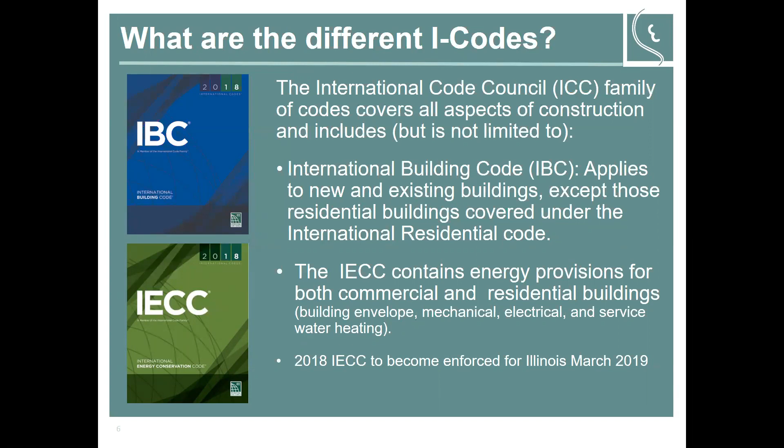And I will note that the 2018 version of the International Energy Conservation Code will become enforced starting March 1st of 2019 with Illinois specific amendments. Updates for this process will be posted to our website as they become available.

One benefit is the International Code Council does provide free access to their codes through an online version. This is a searchable file, but it does not allow for copy and paste. But this can be a very good resource for reference, particularly that search and find feature. So you can search for a term and jump right to the applicable code sections.

Two things that you will see in the International Energy Conservation Code are the terms prescriptive and mandatory. Prescriptive is a compliance path that is kind of like a grocery list, where in order to meet the code, you have to get all the items that are on the list. If you meet each of the provisions individually, you are shown to be in compliance. Mandatory provisions, on the other hand, are required to be complied with regardless of your compliance path.

As we talk about the various building codes and international codes, we do want to ask a question here regarding which building code cycle your municipality is on or the significant portion of your work occurs on. So we'll push that out here and allow people to indicate what building codes you are most seeing right now, not so much the energy code, but the actual building code itself for your area.

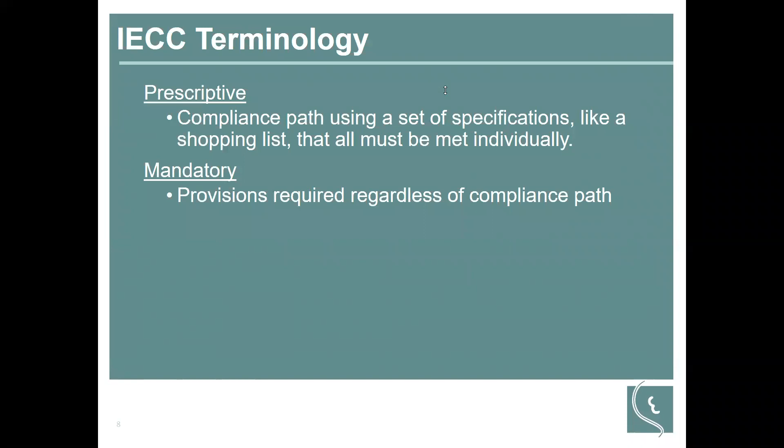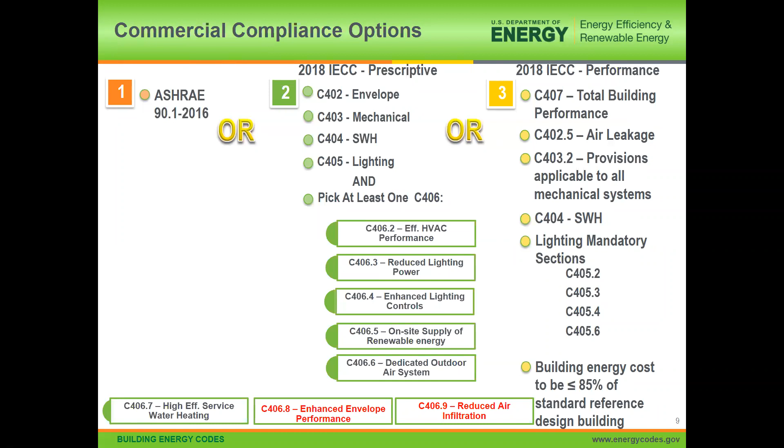But before we do that, let's real quickly take a look at low energy buildings. We sometimes get questions from folks wondering if they can be exempt from the envelope provisions by qualifying as a low energy building. Well, if your peak design rate of energy is less than 3.4 BTUs per hour per square foot, which is equivalent of about 1 watt per square foot of floor area, then you could be exempt from the envelope provisions.

Or if those portions of the building do not contain conditioned space, such as if you're just appending something to your building, such as a storage area or greenhouses. If it's labeled as a greenhouse, it has to be used as a greenhouse. It can't be used as something else.

So the peak design rate, that's a very low rate of energy, the 1 watt per square foot, but you could comply as a low energy building and have an occupied space that's less than 1 watt per square foot. As Ryan was pointing out to me yesterday, the passive house is at approximately that level, and there are people building buildings that use less than 1 watt per square foot.

But if you're doing that, then you are way beyond the envelope provisions in the code anyway. You would be having a very high quality building at that point anyway. So you would be exempt from the provisions if you met that standard.

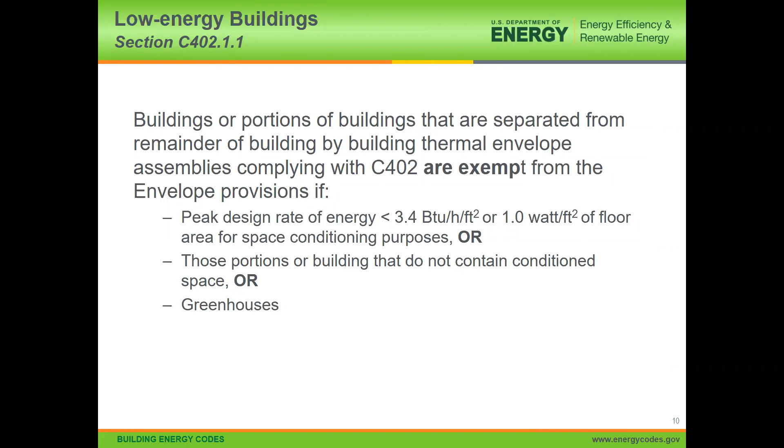Equipment buildings are also exempt from the building thermal envelope provisions. Small buildings, under 500 square feet, intended to house electronic equipment, the buildings you see next to cell phone towers, relay stations, and things like that. The heating capacity of those has to be less than 5 kW, so that's not a lot. And the average wall and roof U-factor still has to be 0.2 or less in climate zones 1 through 5.

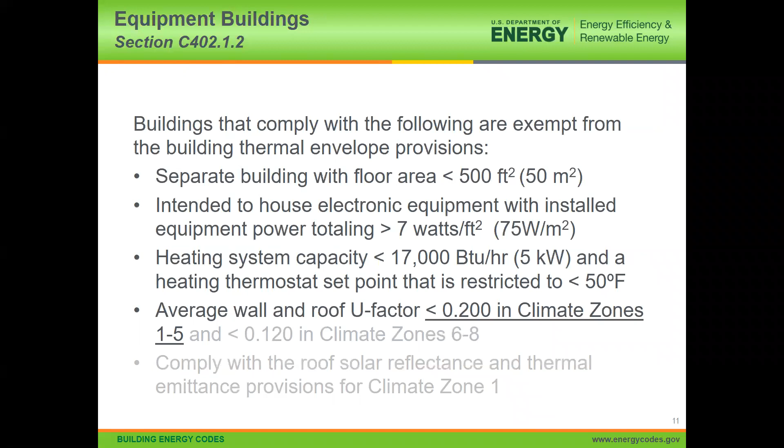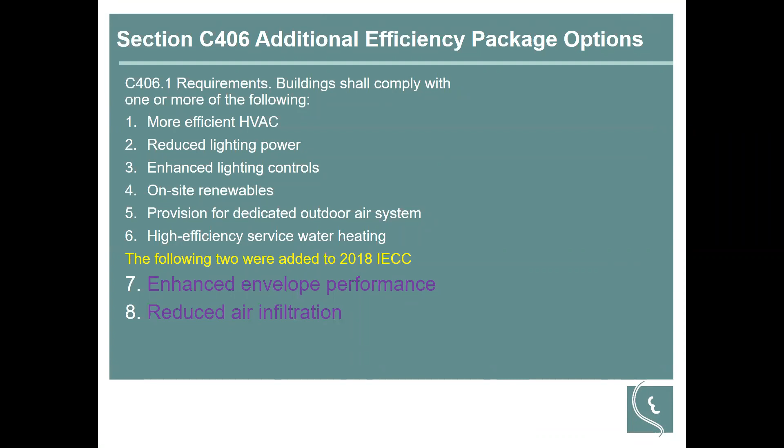So in the prescriptive path, as I mentioned, you have to pick one of the following 8 requirements. So we are going to look at the enhanced envelope performance and reduced air infiltration. So enhanced envelope performance: the total UA of the building thermal envelope design shall be not less than 15% below the total UA of the building thermal envelope in accordance with section 402.1.5. So we look at the code, go to that table, C402.1, I think it's, let me see which table that is.

I'm sorry, 402.1.3, it's the R value table. Or I'm sorry, the next one, 402.1.4, that's the U value table. And you have to be 15% at least below that to qualify for enhanced envelope performance. And enhanced envelope performance oftentimes is using more insulation or addressing thermal bridging.

Thermal bridging is a big deal in buildings. We've known about thermal bridging for a long time. Many of you have probably seen thermal images of buildings, so you can pick out every stud in the picture. So thermal bridging is a big deal.

And I found this one document, the BC Hydro, it's a Canadian company from British Columbia. They fund some very good building research. So if you're interested in looking at how to reduce thermal bridging in buildings, that was one of the first documents I would take a look at. You can see there's a link to that document on the left side there at the bottom.

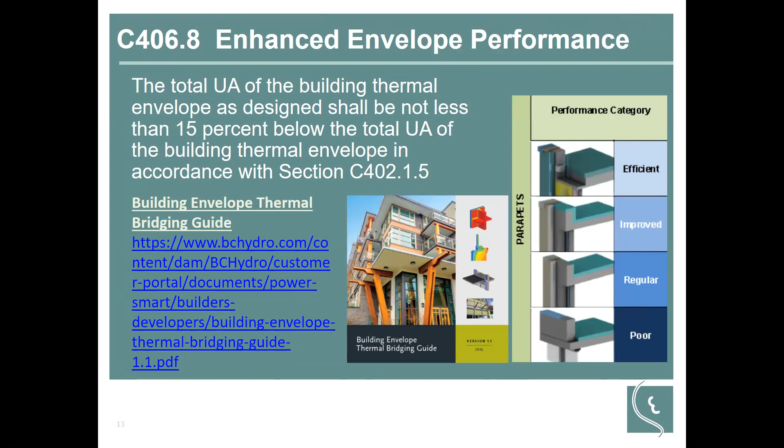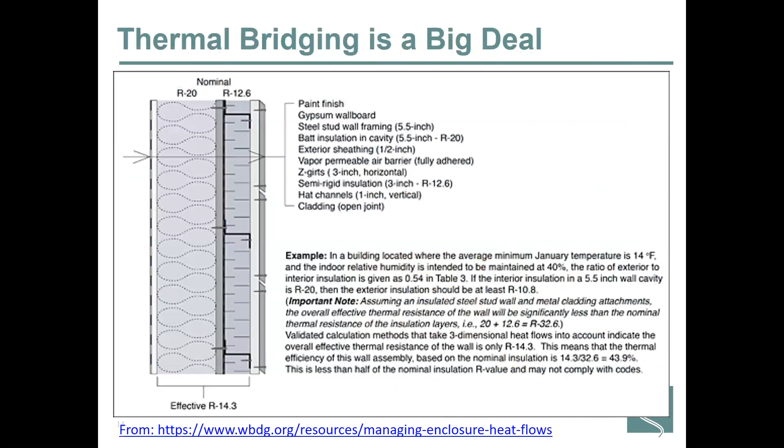So the Whole Building Design Guides are very good resources for information on how to mitigate some of these issues of thermal bridging. So the C406.9 addresses reduced air infiltration. And we do this by pressurizing the buildings. If you have never been involved in a blower door test, if you have the opportunity, they're fascinating tests. And we conducted a lot of those for HUD, and it's amazing where you will sometimes find leaks that you would never have guessed are present.

So to comply with this, the measured air leakage rate shall not exceed 0.25 CFM per square foot under a pressure differential of 75 pascals, which is a fairly large pressure differential. And that square footage is the building envelope surface, which includes the below grade building envelope. So if you have a very large building at 250,000 square feet or more, you do not have to test the whole building at one time, which would be very difficult. Tested areas shall total not less than a quarter of the conditioned floor area.

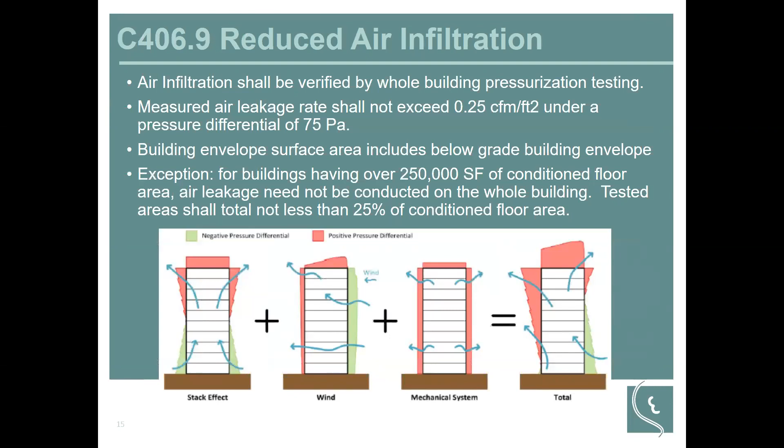So like I mentioned, those last two under the prescriptive, the enhanced envelope or the reduced air infiltration, those are the two that we just covered. And once again, a Canadian source of information, Canada Mortgage and Housing Corporation, they've sponsored some very good research. You can tell that a lot of effort went into these publications, and naturally it gets quite cold up in Canada, and they want to address these types of issues.

Air leakage control is a big deal also, similar to thermal bridging, and this is a very good document. The link is there in the blue, as you see on the bottom left. It's a fairly long document, but it has a lot of very good graphics in it, pictures of how to seal buildings, and it's just in general a very high quality document.

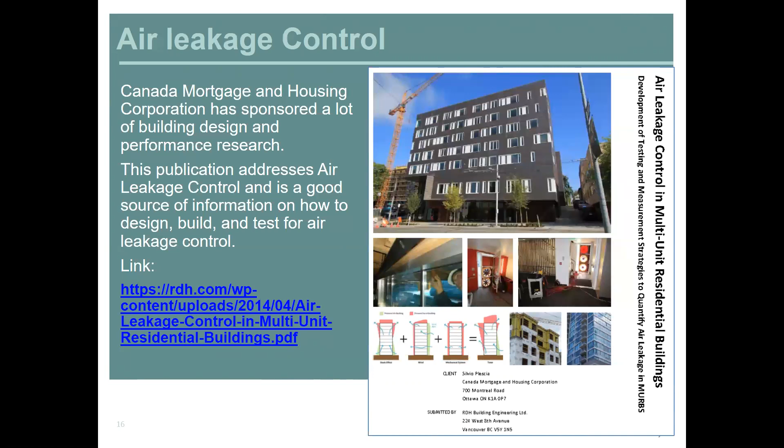Right. Now, as far as how to determine the thermal envelope compliance for the Energy Code, the International Energy Conservation Code provides 3 different methods for compliance. One is the R value table that we had talked about earlier for C402.1.3, and then next is the assembly U factor tables for C402.1.4. And the third is a component performance alternative found in C402.1.5.

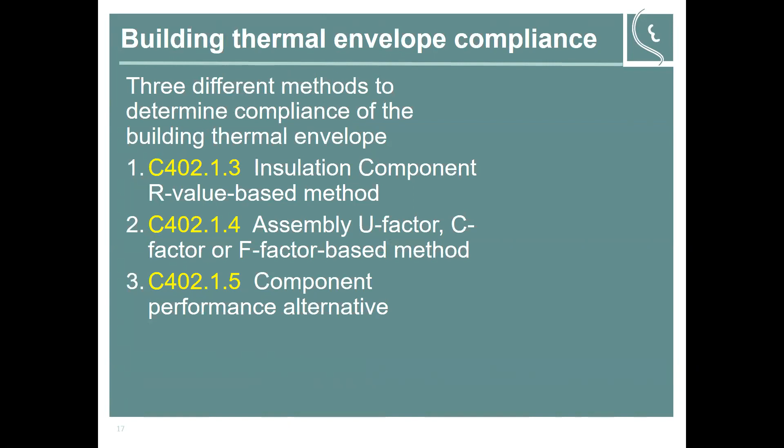And we'll dive a little bit further into what those actually are. So looking at the R value table, again, this is more of a component-based. So if we look at roofs, there was a lot of discussion that we've been hearing as far as roofs, particularly those with insulation above deck. Here in the code, it calls out an R30 continuous insulation value for that.

And so you go through this table and look at each component: the roof, the walls above grade, walls below grade, floors, if you do have applicable and required insulation for floors, such as a floor over a non-conditioned space. You go through component by component and see if you meet the required R value for each one. As noted here, the R value cannot be less than the amount specified in the table, and there are some specific envelope insulation requirements.

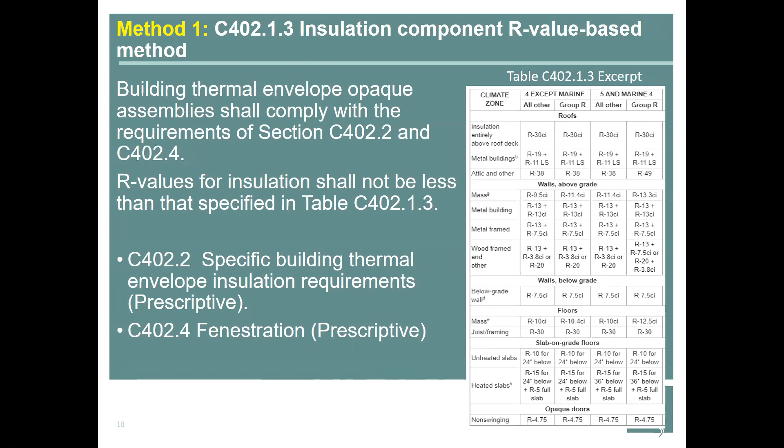So this is one table, and then there's another table for fenestration. Looking at the U value table, this is a fairly similar table to the R value, with U value being closely related to an R value, or a close approximation to the reciprocal of the R value. So with these U values coming into play, this is another method of performance for materials that may be valued based on a U factor rather than an R value.

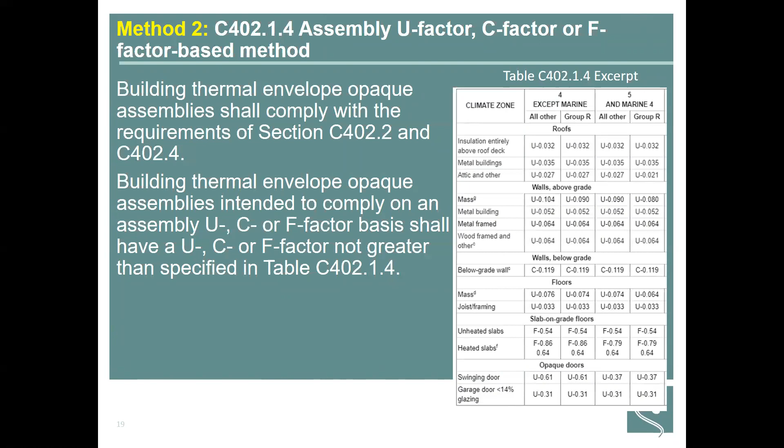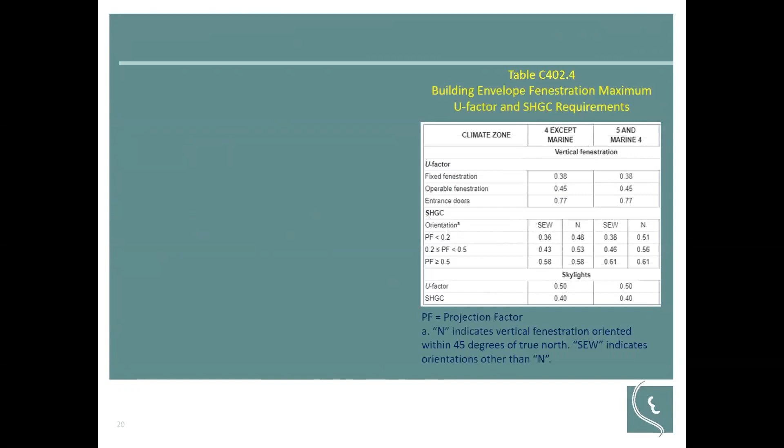This is a continuation of the last slide. This one looks at the fenestration, looking at the U factors as well as the solar heat gain coefficients required for compliance. And as you can see, there's a difference between vertical fenestration, more commonly known as doors and windows, versus skylights, skylights having a slightly less stringent value than the fixed fenestration.

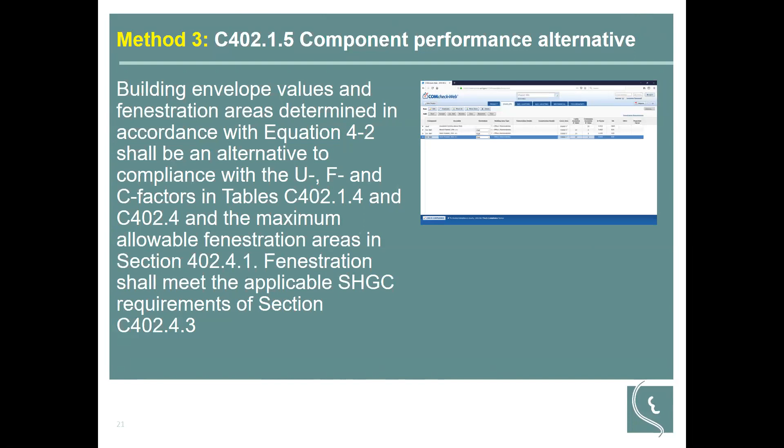The third method, which is probably the more common one that we see used, is component performance alternative. This is the method that is typically used with COMcheck, where this provides some trade-off ability between sections of buildings. So if you have a particular area where you would like a decorative window, a beautiful stained glass window that may not necessarily comply with the U value or U factor tables, you can use this to improve the envelope performance in other locations to bring the total building into compliance. Kind of like a budgeting method where as long as you don't exceed your budget, you can trade money around in different categories.

So this is a little bit of an improvement to the code for heated slabs for 2018. Prior to 2018, the code didn't require continuous insulation underneath heated slabs. Now you have the upgrade for slab on grade floors, moving from an R10 for an unheated slab up to an R15 for a heated slab, as well as adding an additional R5 under the entire slab. And a critical reason for this, as we've touched on, is providing that thermal break to prevent thermal bridging between the inside and the outside.

And if we think about how important a thermal break is, think about a hot cup of coffee in a styrofoam cup. The R value of that styrofoam cup is very minimal, being only maybe an eighth of an inch, maybe 3/16 of an inch thick, but that thermal break between your hand and the hot coffee is extremely important and can be very effective just by preventing that thermal bridging from occurring.

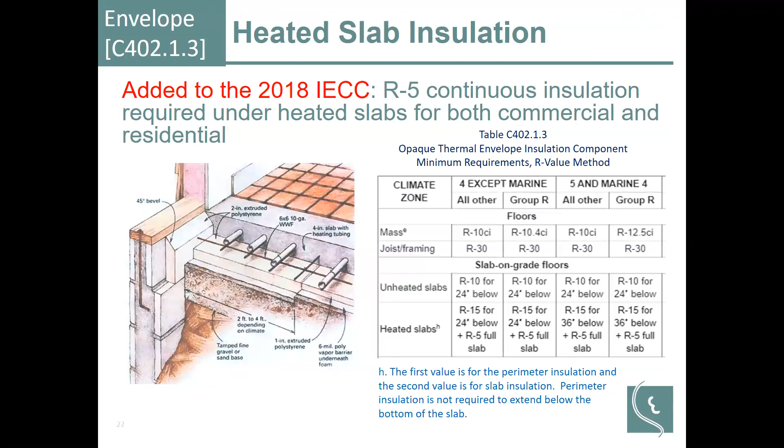Garage door glazing. So this is for commercial doors that have a minimal amount of glazing, now providing a U factor for that glazing in those garage doors.

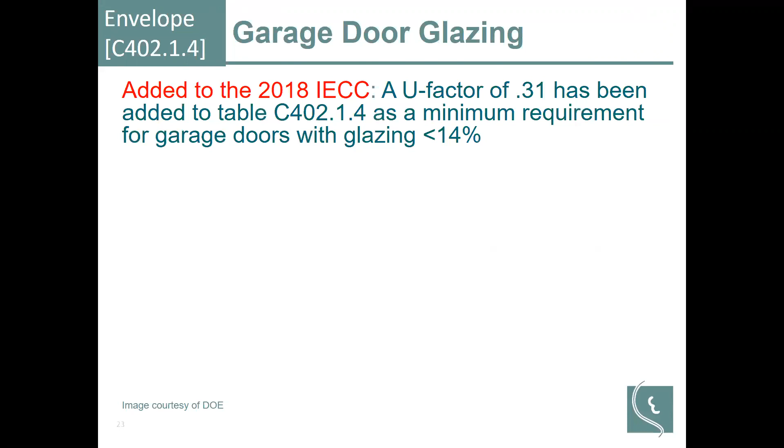Roof insulation: the code now calls out that roof insulation has to be a minimum of 2 layers when you're using continuous roof insulation. Again, in this climate area where we have an R30 required, this is generally not a big issue, being that continuous insulation of R30 is somewhere between 5 and 9 inches. So having 2 layers of insulation is fairly common.

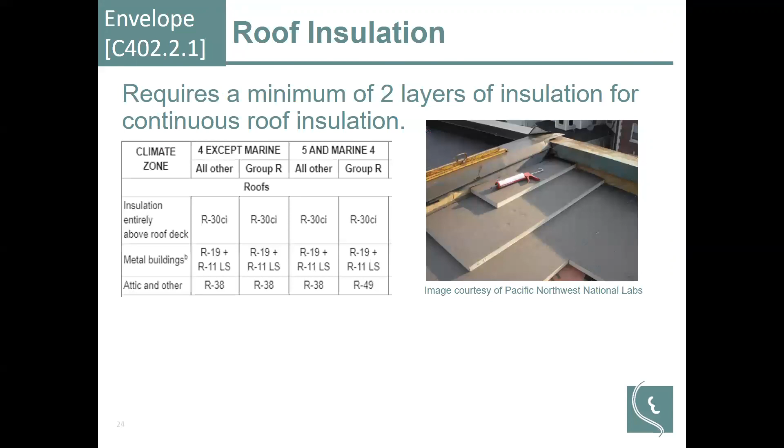Now something I will call out in this photo is we do have a potential flashing issue where this roofing meets the parapet walls and that common wall. And be cognizant that the code does make some allowance for renovations where existing conditions may not allow you to fully comply with the code, so make sure we're doing the best that we can within the existing conditions that we are given.

As far as tapered roof insulation, this is a difference between IECC and ASHRAE 90.1. IECC does have a provision for tapered insulation, whereas 90.1 does not. What this allows for in the IECC is a reduction of up to 1 inch from that required to achieve the R value specified in the table. So in this case, using our R30 again, if I'm presuming an insulation with an R6 per inch to be used, that would be about 5 inches of insulation to reach our R30.

So what this allows for is if we're using a tapered insulation, the minimum amount that we could go down to would be 4 inches, assuming there's no technical infeasibility to fitting that much insulation during a renovation. But this does provide for a minimum amount of insulation, and the overall R value does still have to comply with the table.

Now with tapered insulation, even if you're down at an R24 at the minimum, your maximum as you move away from your roof drains and your scuppers could be rather substantial. It's not uncommon to see an R40, 50, or even 60 as you move away from those penetrations.

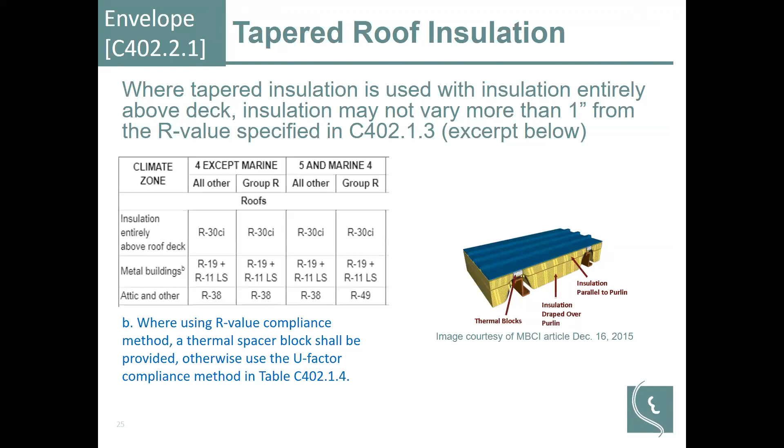One that's parallel to the purlin, which is your cavity insulation, along with the thermal blocks to prevent that thermal bridging. We've got non-compressible insulation to provide that thermal break between the metal inside of the building and the metal roof deck for the building.

One of the new additions to the code are skylight curbs that have to be insulated. You see here in this illustration that most of that curb is insulated very well because it's adjacent to the roof insulation, but anything that projects above that roof insulation has to have a minimum of R5. Which isn't a lot. Ryan and I were talking about this yesterday.

Warm air rises and warm air can carry more moisture with it. So if you have a lot of warm air that's fairly moist pooling up in your skylight, where's the first place where you're going to experience problems? Well, it's right in this area, where this is going to be the coldest part, right up in here.

So the drywall in this area will have moisture, and down in this area, not as much moisture. And if we're going to have any type of mold problems that start to evolve, it will be up in that higher portion rather than the lower portion. But at least we've got the R5. That's better than nothing.

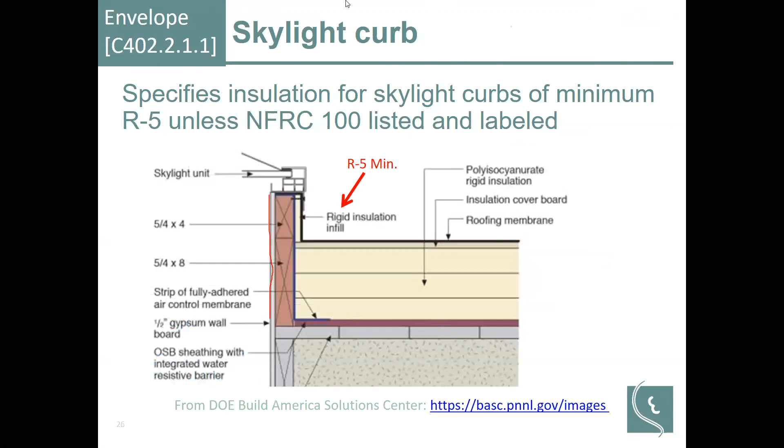It's not working here. It's not advancing. I'm sorry. There we go. Okay, we're having a problem advancing the slide.

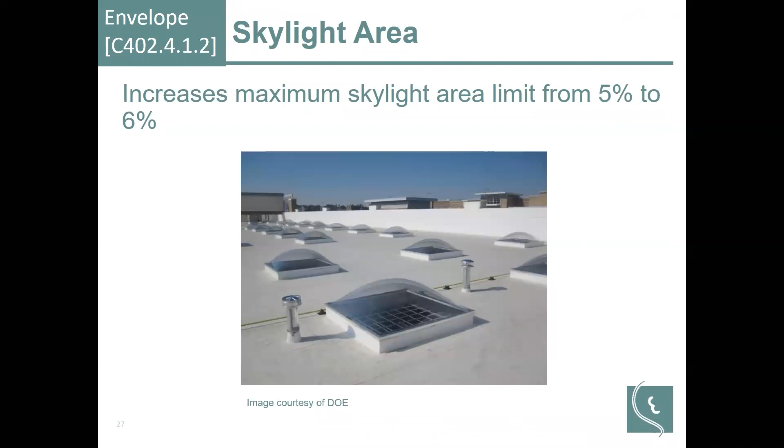Skylight areas: in large spaces you have to have skylights, which we'll talk about in the next slide, but there is an increase now in the maximum amount of skylight area you can put in from 5% to 6%, and that is if you have certain daylight dimming controls for your lighting system on the inside. And you have to have minimum skylight area in spaces over 2,500 square feet, with at least 75% of the ceiling over 15 feet above the floor.

And there are a lot of different types of spaces that this is required in, such as offices, lobbies, atriums, concourses, corridors, and the list goes on and on. A lot of spaces where you have to put skylights in for natural daylighting.

They have to have a glazing material or diffuser with what's called a haze factor of greater than 90%, so that we're not getting direct sunlight beaming down into our space. We want to diffuse that, not have that direct beam pouring into our space. So there has to be some type of diffuser, and that may be the skylight itself or something below that skylight.

I guess the biggest concern, and always has been, is that skylights can leak. If we're going to have a roof leak, it's usually going to be at a penetration, as you see in the photograph there, either at the vertical penetration of those vents or probably around a skylight. The field usually is not what leaks. But with modern roofing materials, those are much less of a concern these days if it's done properly.

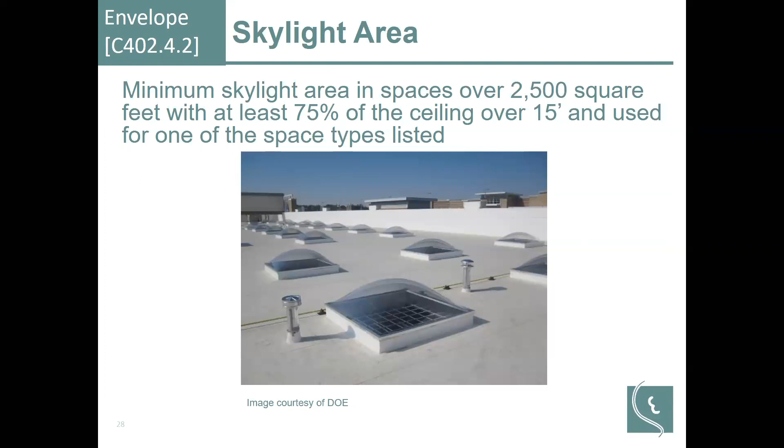And there have been a lot of studies showing people like being under skylit spaces. I think it was Walmart that conducted some studies, and they found higher sales under skylit areas in their stores. There have been studies in office buildings where people prefer to be in daylit spaces versus non-daylit spaces. So there's a lot of good reasons to put skylights into a space, and it reduces your lighting load too. So it's an advancement in the code.

This is also new in the code, masonry walls with integrated insulation.

We're all familiar with the cavity wall with the continuous insulation, and ones below that are either foamed in place or the molded polystyrene inserts. Those used to be, you couldn't use those or justify them for insulation purposes. Now you can, but you have to use the U-value table if you're using those forms of insulation. So the R-value table you can still use for the continuous insulation, which is table C402.1.3, and then the following table, C402.1.4, you have to use the U-value table for the latter, the bottom two there.

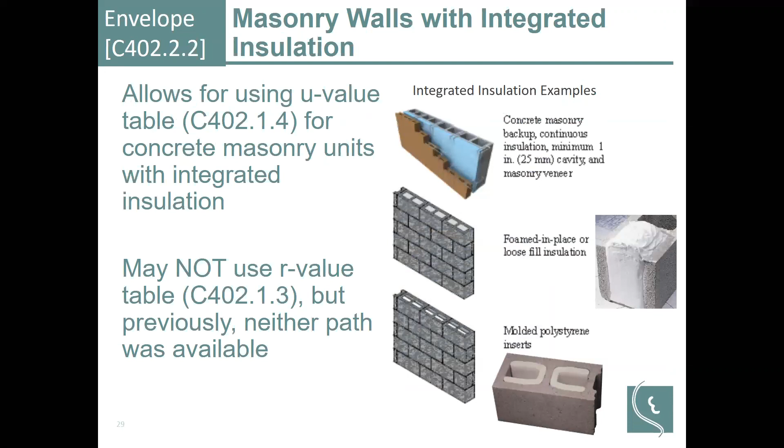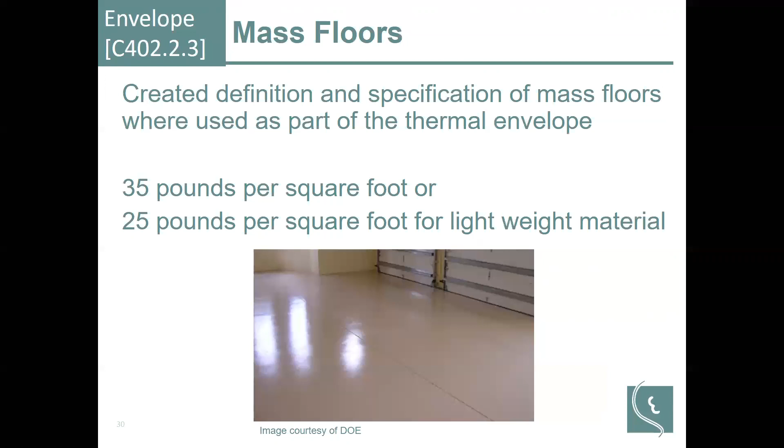A new entry into the IECC are mass floors. There always was C402.2.3, but a new addition to that, they call out mass floors, and those require a different type of, you can see here, well, they're 35 pounds per square foot or 25 pounds per square foot for lightweight materials. The structural concrete is up to about 150; a lightweight structural concrete is about 115 pounds per cubic foot. So that would fall under probably the 25 pounds, and standard weight concrete is about 150 pounds. That's the 35 pounds per square foot. That's just called out in the code differently now.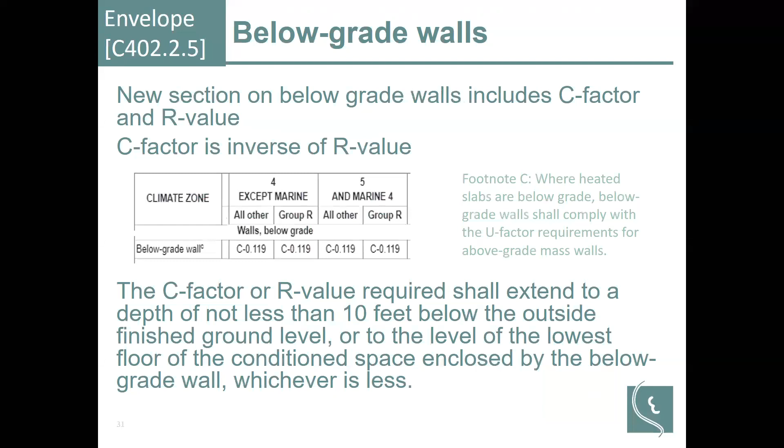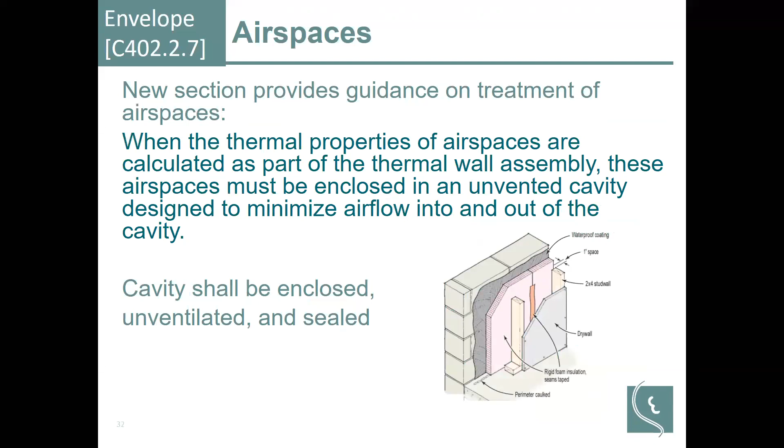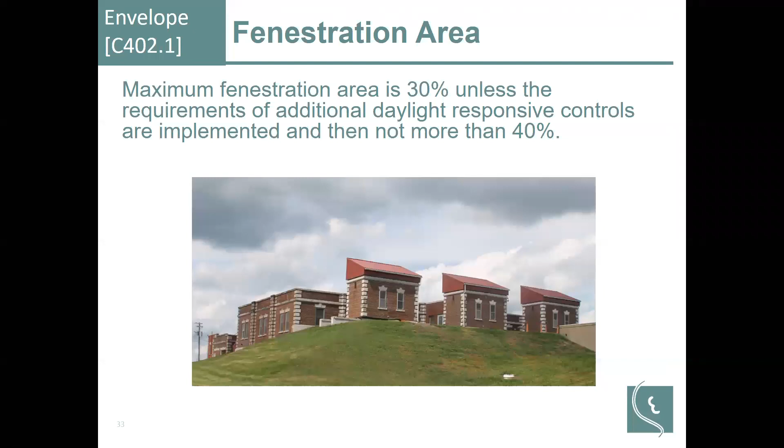Now, as we move over to fenestration, the code calls out that the maximum allowable area is 30%. Now, they also do have a provision that allows you to go up to 40% if you meet several criteria, including some additional daylight responsive controls. Some of this also includes such things as having at least 50% of the floor area be in the daylit zones for buildings that are 1 and 2 stories above grade. And for buildings that are 3 or more stories, the daylit zones must cover at least 25% of the floor area. So that can tie very nicely with what Robert had talked about earlier for the skylights and providing that daylit area from above. That can help with your fenestration area here.

As far as the solar heat gain coefficient, things continue to improve with time, where solar heat gain coefficients have decreased just slightly, just a couple of points, from the range of 0.4 up to 0.64, depending on the fenestration, down to 0.36 to 0.61. So a slight improvement, and that ties back to materials and technologies improving, making things more cost-effective with time.

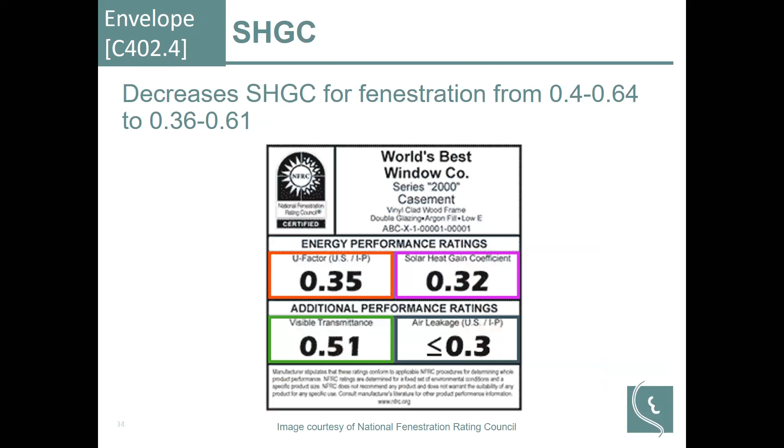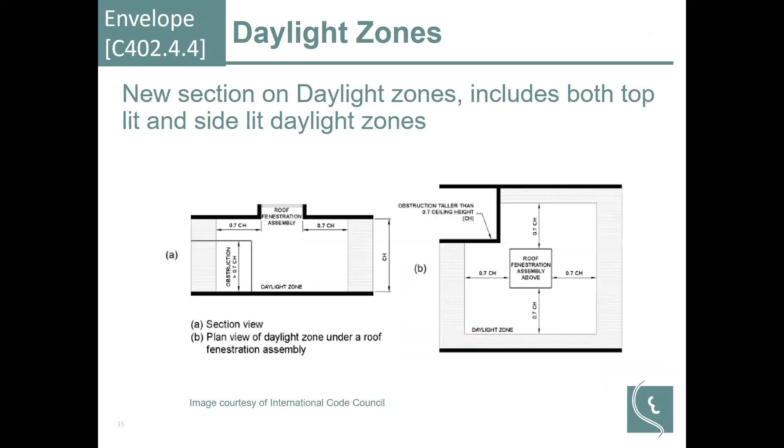Air leakage, this has been a particular focus because air leakage is a big factor in sizing of equipment, as well as air infiltration typically can bring pollutants with it. And so trying to make sure that the pollutants that are generated outside, whether that's via adjacent garage space or other areas of pollutants, we seal our buildings to prevent those pollutants from entering the buildings. So here, for the commercial side, thermal envelope air sealing with an air leakage rate of not greater than 0.4 CFM per square foot of building envelope.

And the two primary ways to establish this are either designing and constructing using the materials found in a listing that's later in the code that we'll talk about here shortly, or the second is to do an air tightness envelope test. So some of these blower door tests, previously with older technology where you had to run tubing to connect all the blower doors together, were very problematic and difficult to do. With the advent of wireless and Ethernet and networked controls, that has become much easier to do. Now it's still not very common to do.

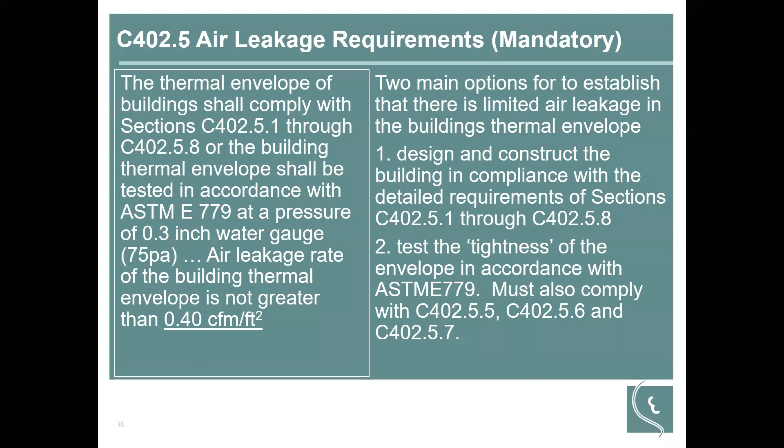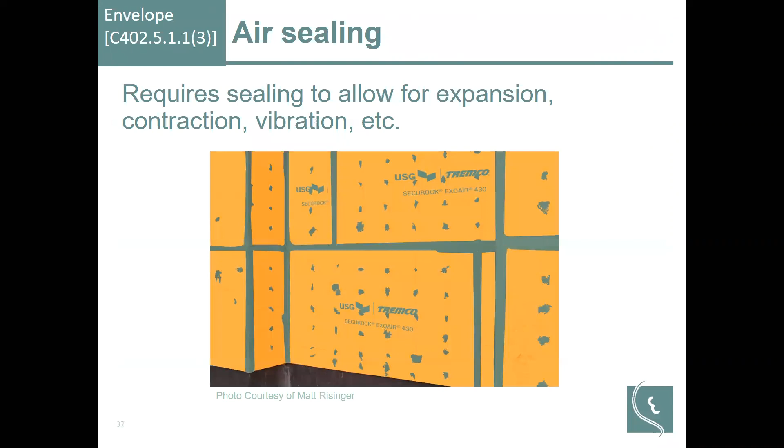As far as air sealing, again, we want to make sure the integrity of this air sealing lasts over the life of a building. And so making sure that the code requires that your air sealing allow for expansion, contraction, and vibration, because we don't want the air sealing to tear and then not be effective anymore.

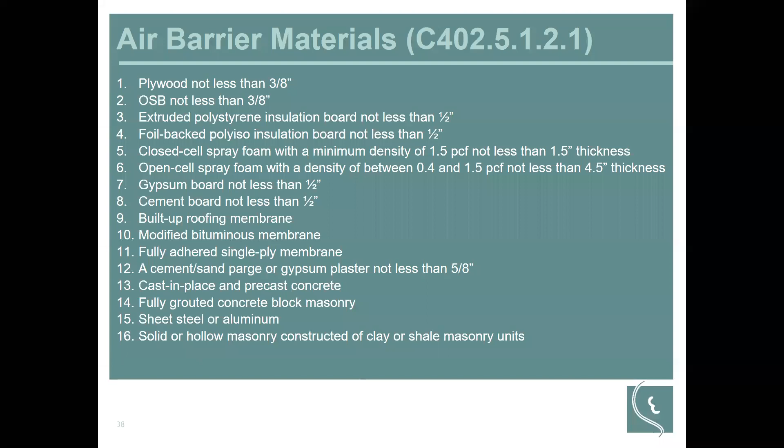So something to consider is with air comes vapor. And so vapor barriers are very important, as when you have water vapor and warmth, frequently comes mold. And so the building envelope must not only deal with bulk water, such as rain, but also the water vapor coming either from the exterior environment or from interior sources, such as showers, occupants, cooking, plants, and the like.

It's not uncommon to see kraft-faced fiberglass batts stapled to the inside face of studs and not to the front face, overlapping that paper. Stapling it to the inside not only allows for a discontinuity to occur between the batts, but it also may not comply with the manufacturer's installation instructions, as this also will lead to a compression of the insulation and creates a pocket where convective air currents are able to occur, decreasing the effectiveness of the insulation.

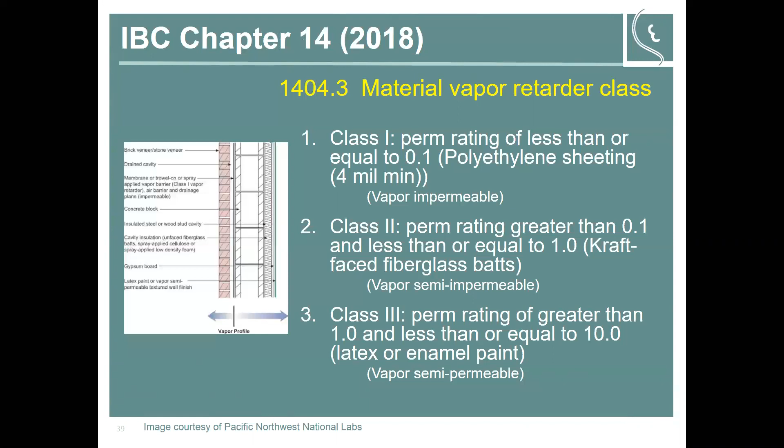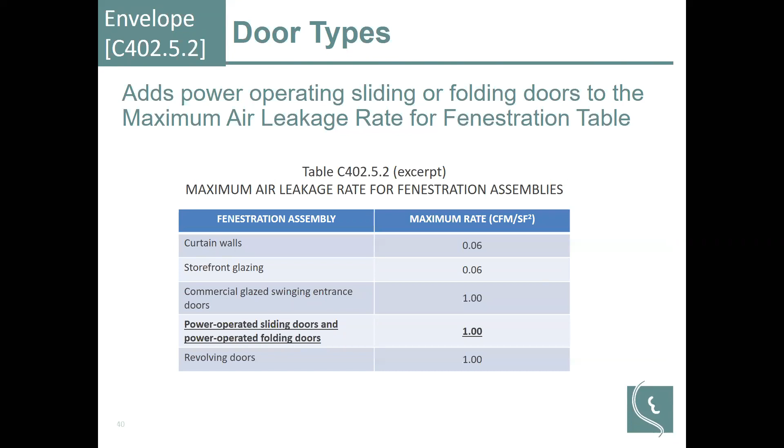Code has added a new door type for power operated doors in commercial areas. As you can kind of get a sense and see here, it's now more of a maximum leakage rate for operable doors versus those that are stationary, curtain walls and storefront glazing.

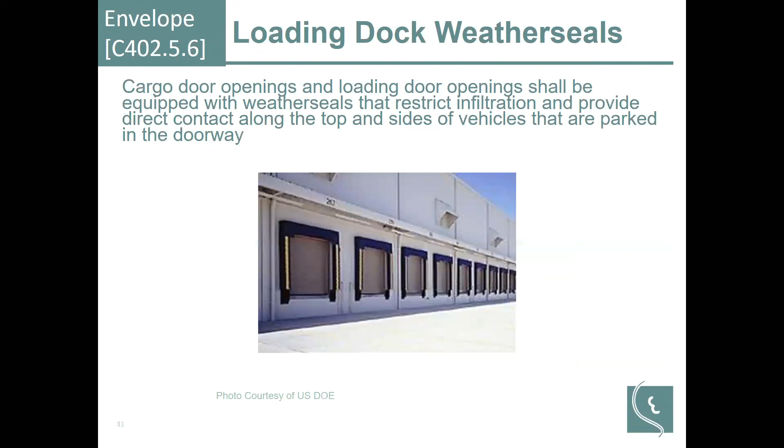The code also added loading dock weather seals, which is depicted here, to restrict, again, this infiltration while a truck is parked at the dock being loaded and unloaded. So providing that direct contact along the top and sides between the truck that's parked in the door and the potentially open doorway.